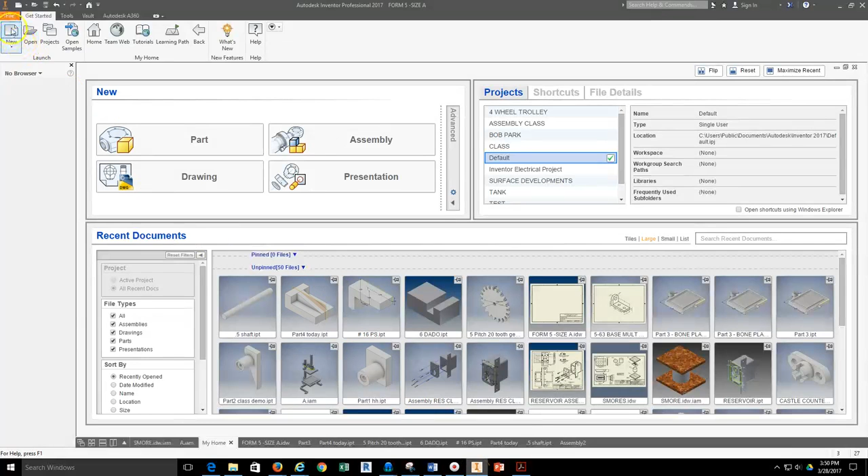Okay, if we're going to go ahead and create number 14 here from the problem sheet, first in Inventor, we're going to jump back into Inventor and start a new part by clicking on the New button. It's going to bring up the Create New Part file. Make sure it's an English part file. Make it a standard IPT file, and hit Create.

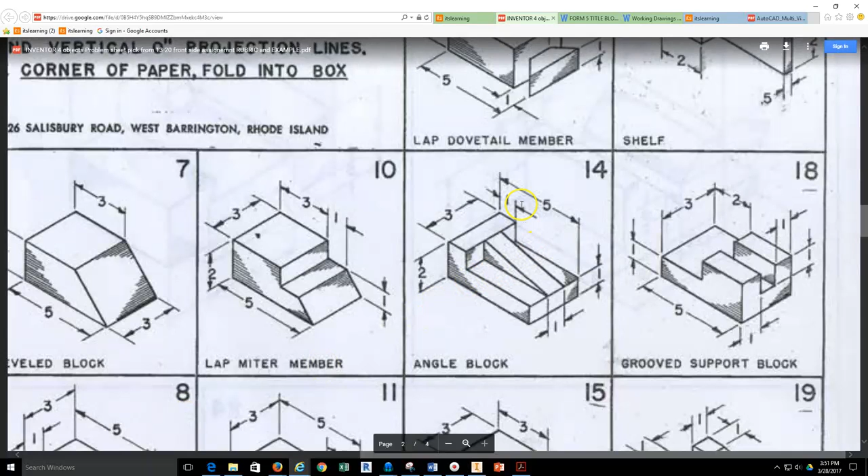And as we wait for the file to load, what we're going to be doing here today is working on creating a part and then utilizing some work features, specifically creating a work feature in the center of a part to extrude in both directions. So if we come back and we look at that image here of number 14, what we're going to do is draw this front view, the profile of this front view, over 5, up 1, back 4, and so forth. And we'll go ahead and get that sketched out.

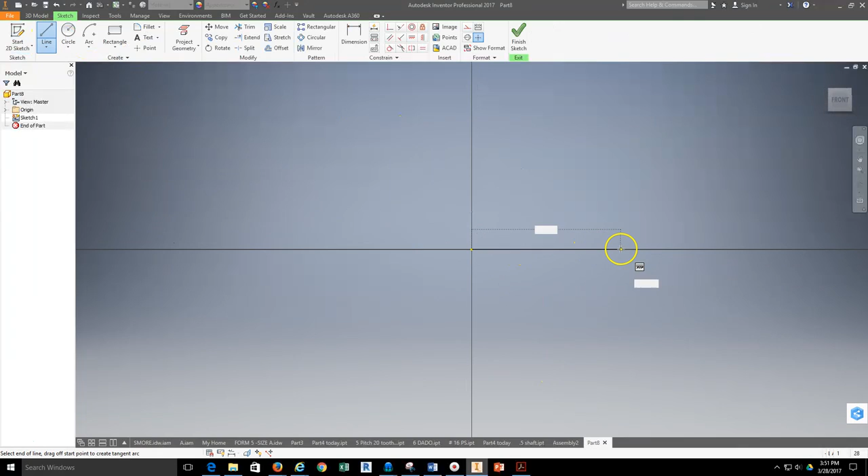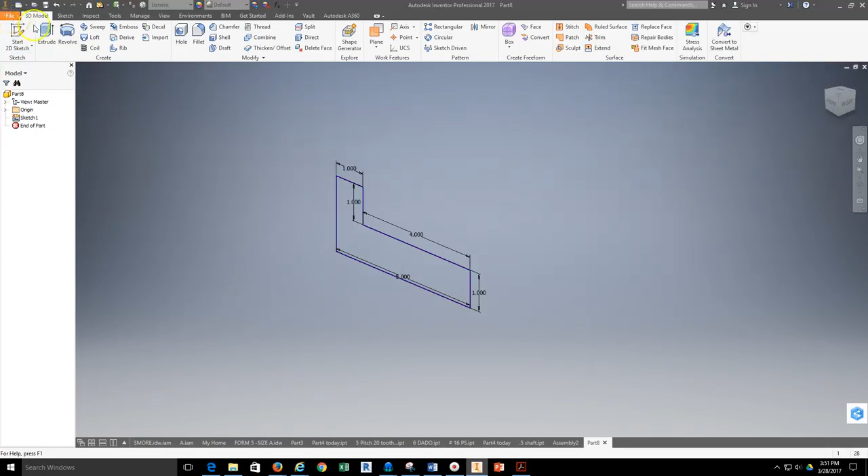So I'm going to grab my 2D sketch tool and grab my XY plane. Then I'll go ahead and grab my line tool, sending it up on center point there, pulling out, setting up 5 inches, and rollerballing out, pushing the drawing over with the center rollerball. And then we're going to come up 1, back over 4, up 1, back 1, and then back down to the start point for 2 inches. Then we'll finish that sketch, zoom back out, and we'll set up the extrude tool to go ahead and extrude this object so it extrudes out 3 inches.

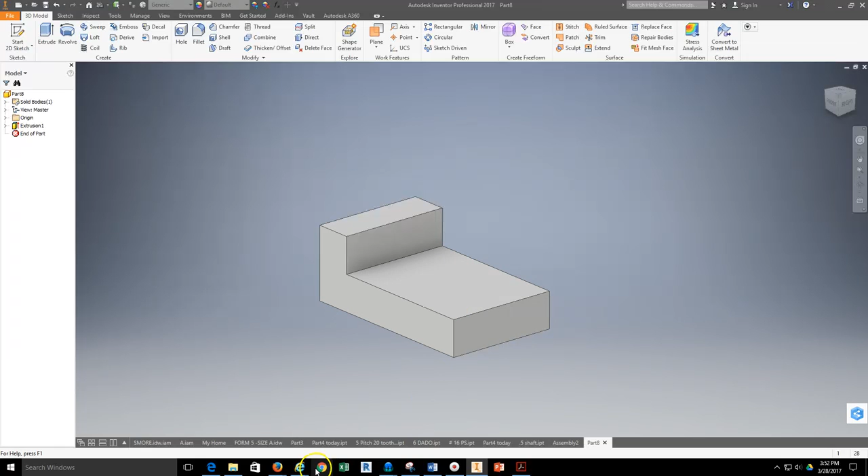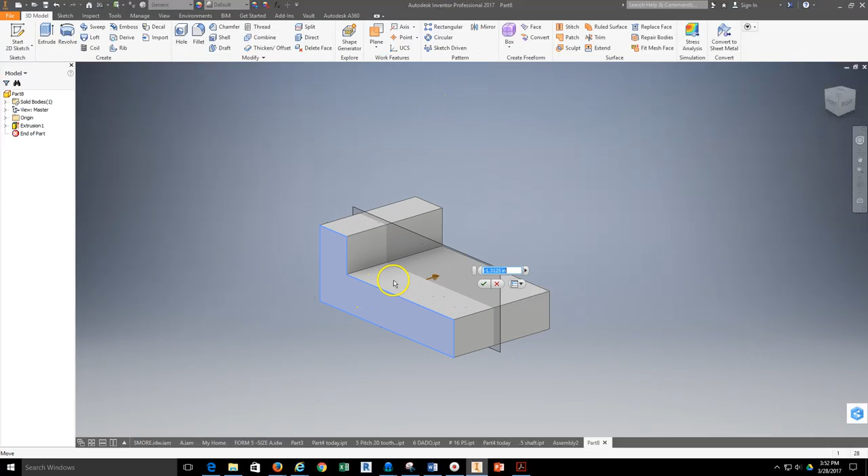Now after we have this object extruded at 3 inches, what I want to do is I want to get a work plane directly through the center of the part so I can add the remaining geometry to build out that center angle piece for this particular feature. So to do so, in Inventor, I'm going to work with my work features, where I pull down my work feature, and there's several work features we can actually utilize to do this. One of them can be offset from plane, where if I select a plane, hold down my left mouse and push in, then I can type in the distance I want to offset. So this would be a negative 1.5 to find center at 3. That would be one way to do it.

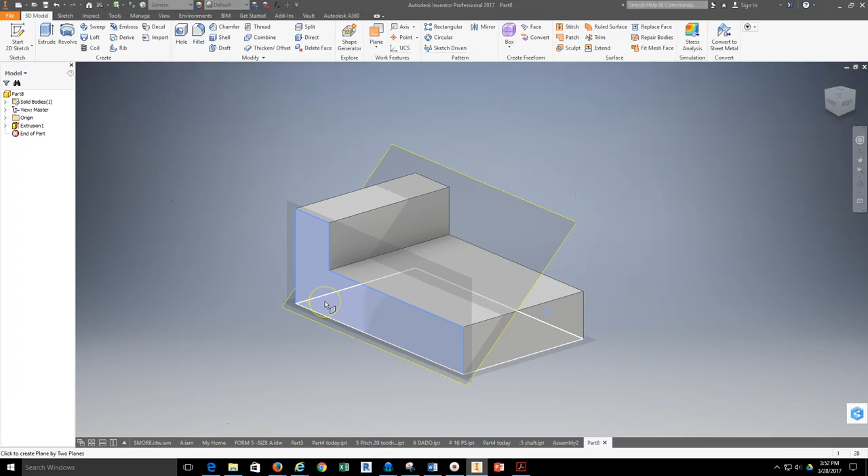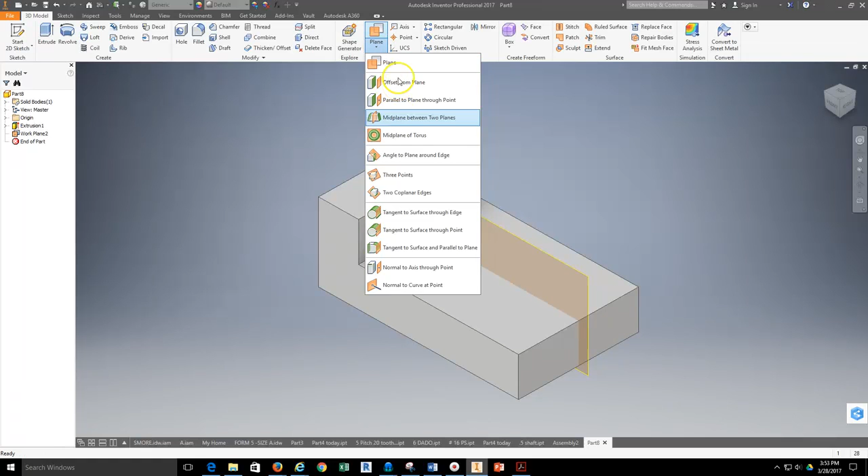Another way that the work features function is if I grab the plane tool and I come down and I actually want to make this mid-plane between 2 planes. I can go ahead and select this front plane as my first plane, and then I can find the back plane. As I mouse over that back edge, it finds that back plane, or if you would like to actually turn your part around here, you could do so and then grab that back face, and by doing so it then places your work surface directly in the middle of your part. Either way works. There's also other features here to do that, but those two are just two great easy ways to show you how to get a work plane directly through the center of your part.

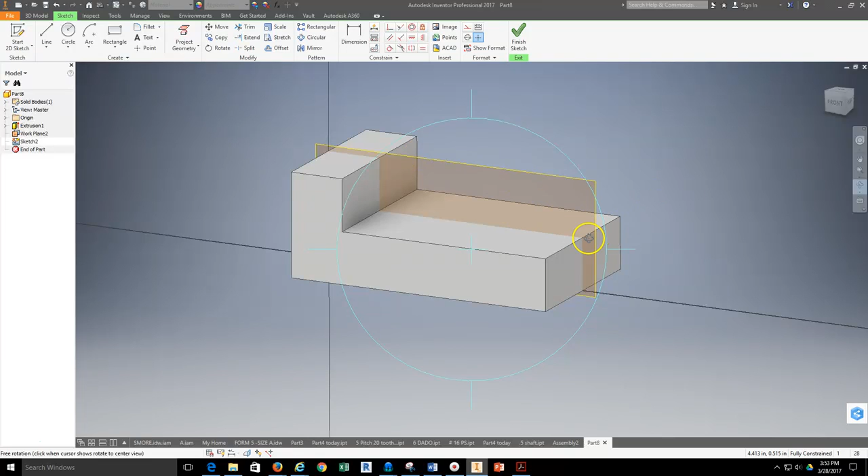Now with that, I'll grab my 2D sketch tool and I'll come down and select the edge of that work plane. By selecting the edge of the work plane, it now places a 2D sketch on that work plane. Now any drawing I do will occur on that work plane sketch. So I go back to my front view, and now I go ahead and grab my line tool. And I'm going to mouse over this top corner point, waiting for that to turn green. Two things are happening when that occurs. It's locking on to the geometry that is being projected from the front edge to the work surface.

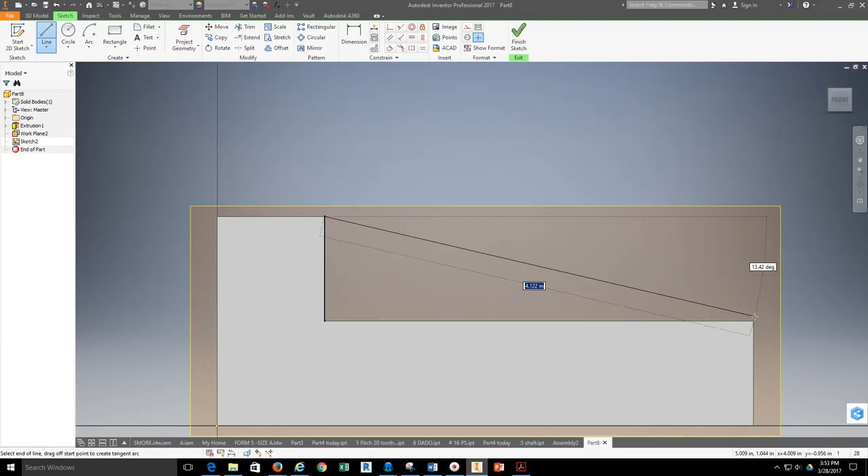So as I come down, wait for this to turn green, and then go ahead and select, what I've done is I've now just created a line that is going to run from this piece of geometry that was projected from the front edge to the work surface. Inventor does that automatically to give you something to lock to. And then it has drawn this angle to this particular piece of geometry, again, projected from this front edge for you. Now, I can continue and get my closed loop and draw from this point to this point with a line. That would work fine.

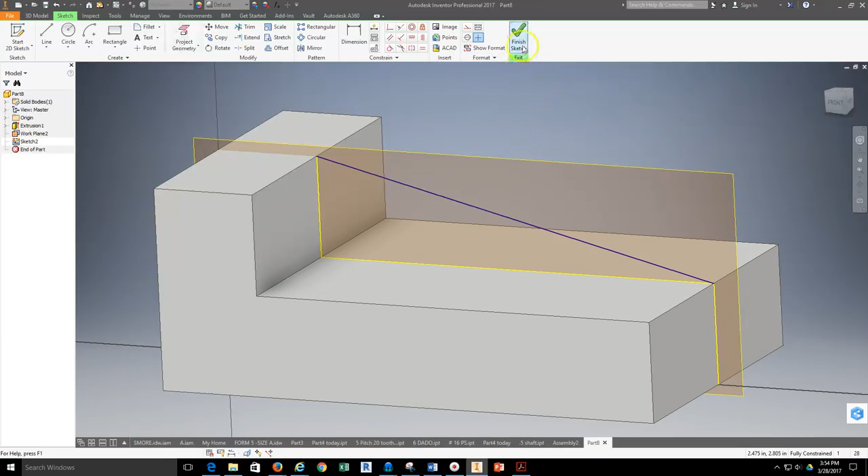Or I can utilize this project geometry option again, grabbing this project geometry button. If I mouse over this front edge and sit over top of just this front edge and then select it, it projects the geometry onto this work surface, as you can see, these yellow lines there. So with that being set up, I can hit Finish Sketch and then grab my Extrude tool. Mouse back over this closed looped area, and it finds the only closed loop here on the sketch is here in the center. So what we'll do here is change the distance. We want this to be 1 inch.

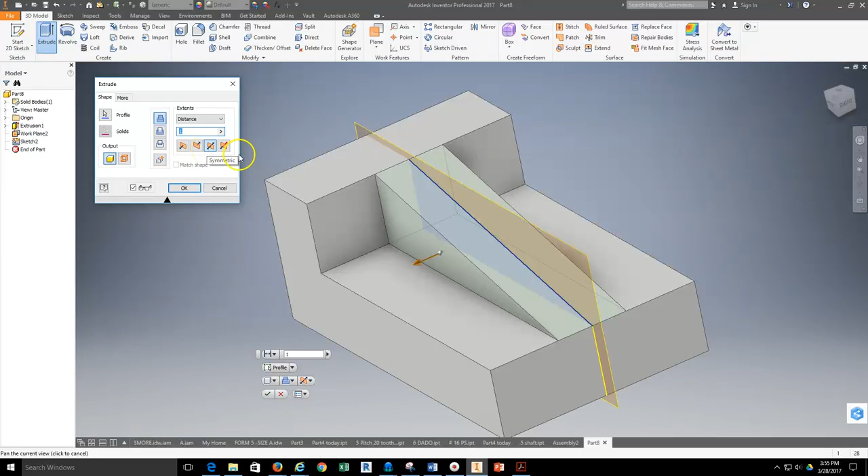However, we don't want to extrude this in one direction. We actually want to extrude this in both directions from our work plane. So we'll change that by using the Symmetric Extrusion tool. This takes it in both directions, splitting that 1 inch distance. Go ahead and hit OK. And then we can come back out here to our isometric view.

And what we can do now is either keep this work plane here, or we can turn that work plane off if we don't want to view it. So I can right click and turn the visibility off. We can't delete it because we have a sketch that is being hosted by that work plane. This is now a complete object for what would be number 14 off of this problem sheet for technical drawing. Hope that helps work out some issues on how to utilize the center work plane feature.